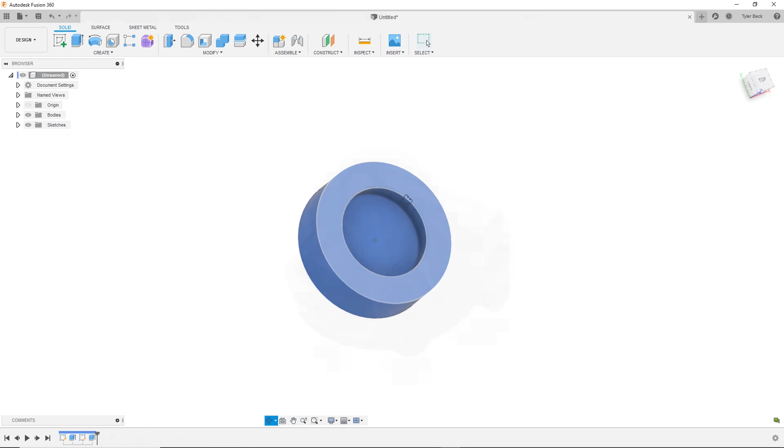How do you go from making something like this to something like this? We're going to go through this beginner tutorial making this manifold, also covering 24 tips that every beginner should learn, coming up.

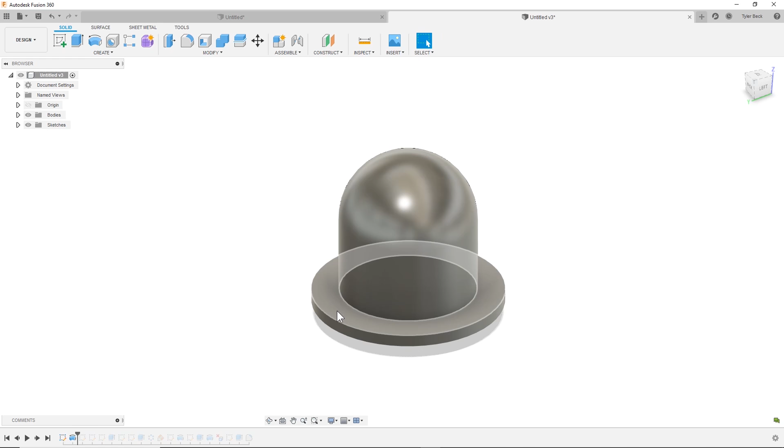When I was just starting out with CAD modeling, something like this would be really intimidating. When I look at it, it's got all these crazy features, and I start trying to think of one feature that could solve all this, and that can be overwhelming. So instead, if you can break it down into simple shapes, first, your simple solids, that's not as hard, right?

That's a revolve and then a simple boss, some cuts, patterns, adding additional features. And yes, there's some tricky parts to this, but we can do this. So let's run through, as well as calling out 24 different beginner tips that hopefully will be helpful for you. So let's get started. So I got this from the SOLIDWORKS Model Mania.

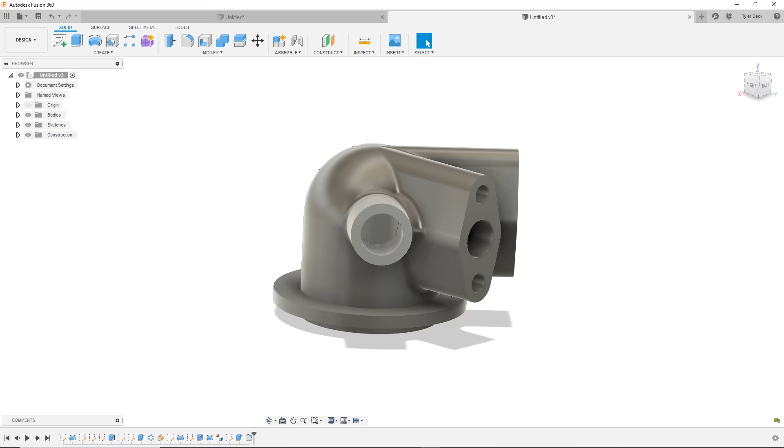If you want to check out this drawing, I'll be referring to it throughout the tutorial. But it's a great exercise, and it's something that actually can be done incredibly fast, like in minutes with a lot of practice. So this is a good one to work through. Okay, the first thing I want to do is make sure that my units are set correctly. So I'm going to be working in inches on this example.

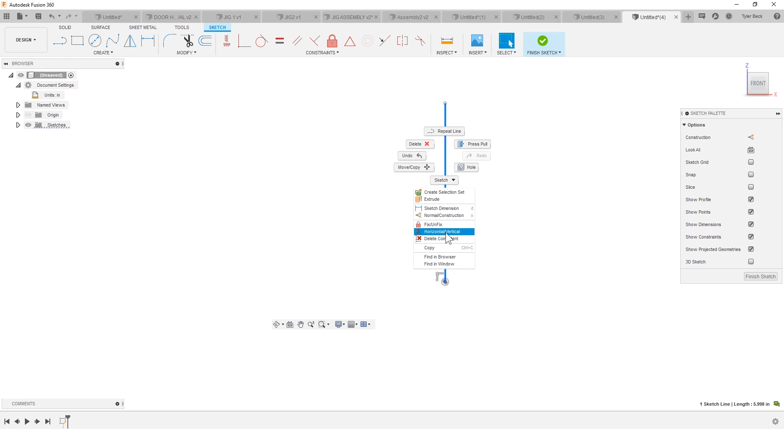Looks good. Starting a sketch on the front plane, I'm going to sketch a line, and I'm going to use a construction line. There's a lot of ways you can turn this to construction by selecting it, right click and choose construction. I hit X on the keyboard. I'm in the habit of doing that. Okay, so I'm going to start sketching line, arc by dragging. So I was about to draw the third line, and I drag it out, and it creates that line to arc. That's a tangent arc.

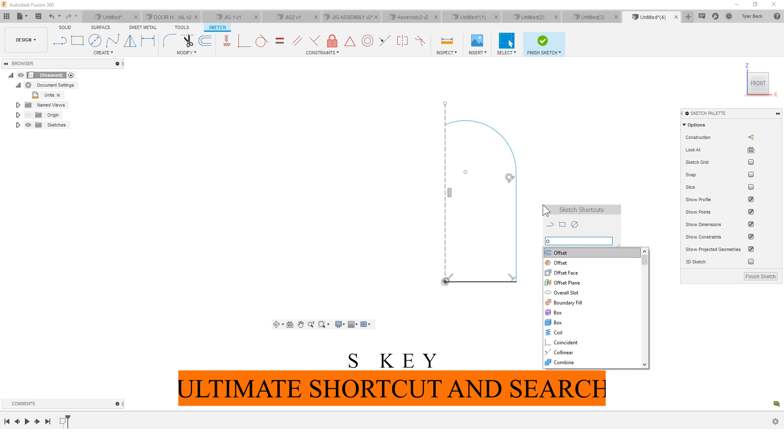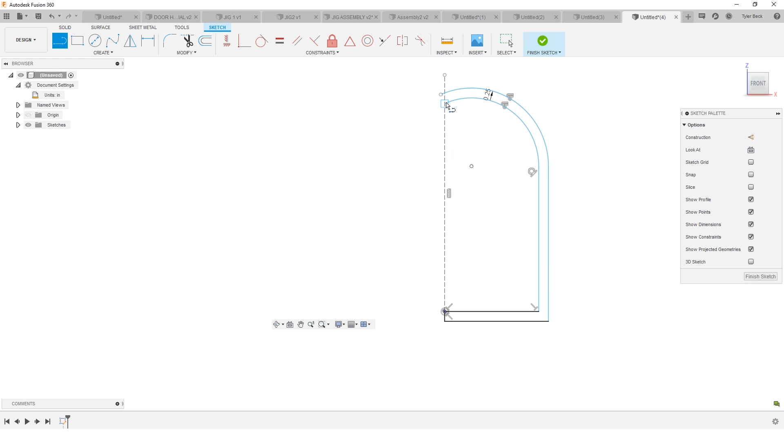Next, let's use the offset command. I'll use the S key, offset. Okay, so I'm going to offset this entire shape. I am chaining this selection, that's fine. Looks like it's extended this, so I'm going to go ahead and finish this out. Use the line command to connect that and connect that. And we don't have to trim it, but it's a good practice to clean up your sketch.

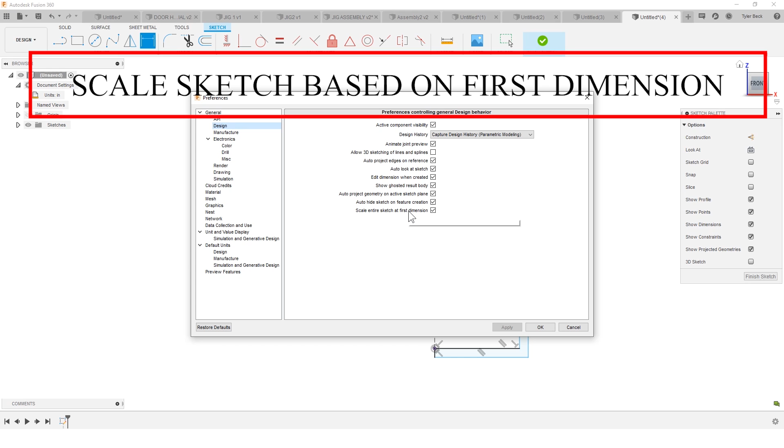S key, I'm going to use the rectangle. Okay, you'll notice that my entire sketch just scaled based on the first dimension that I dragged in. And why is that? Okay, so when you go to your preferences, there's one I love to use. It's the scale entire sketch, and I've got a tip out there for that as well.

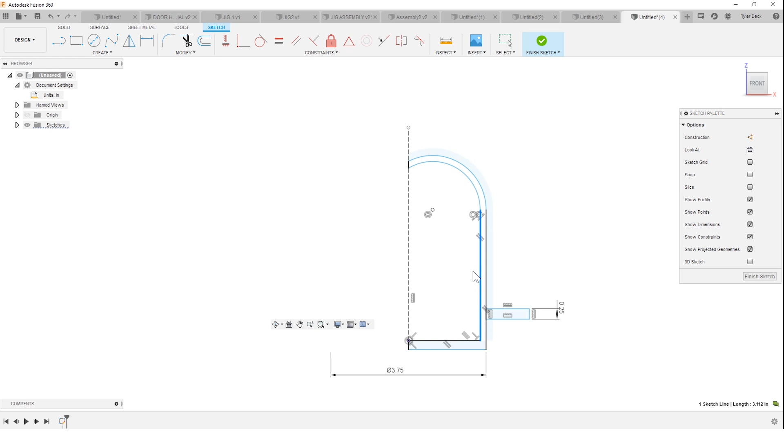Okay, so let's do some dimensions. Dimension to the construction line. And it is sensitive to the order. So I'm going to dimension from the center line, construction line first to the edge, right click. I'm going to do a diameter, and I'm going to dimension out. So it's doubling it over so that I know that it's a revolve. And that lets me avoid having to do that math, but also it's going to make it a little more clear down the road when I'm kind of editing this design or working with it.

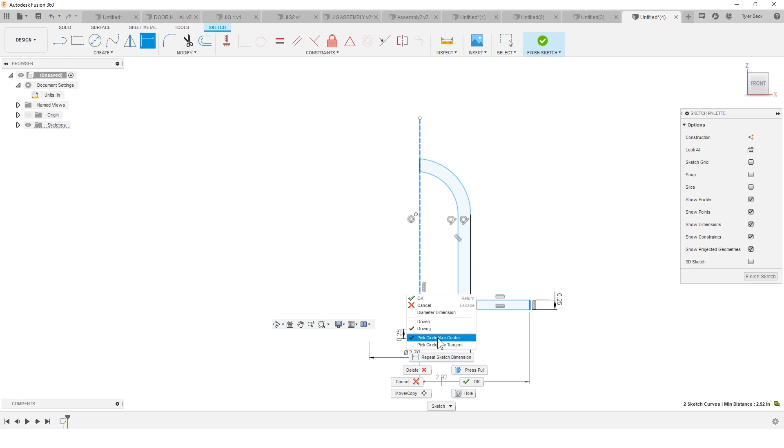Okay, hitting D on the keyboard. Okay, dragging this around, that starts to expose to me what's missing in our design. And the dimension from the construction line to this outer edge. Right click, diameter dimension. Add the overall height, go from the edge to the point. Dragging it in. Let's finish off our dimensions.

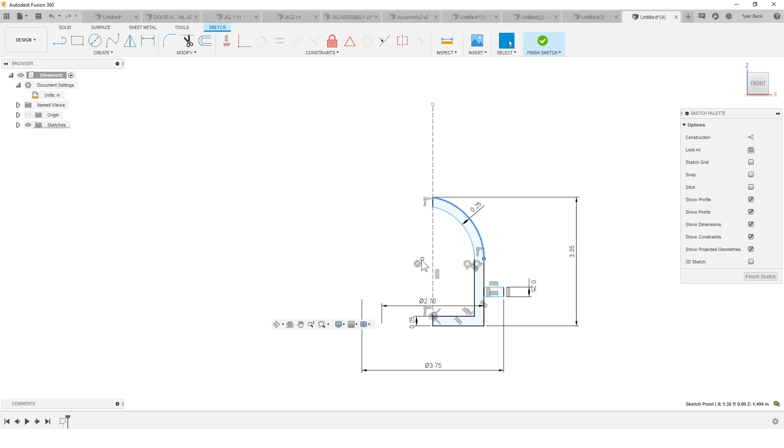Okay, next I want to make sure that this arc is defined, and you'll notice the center points are off in space. There's a number of ways I could solve that, but one way is I'm going to select the center point and the construction line and have them line up or coincide, make them coincident.

Okay, so one thing I just noticed is I messed up. And this is going to happen if you didn't intend to have this sketch entity here. I don't want to revolve these shapes, this bottom boss. I want it to be open. So how do I get rid of that?

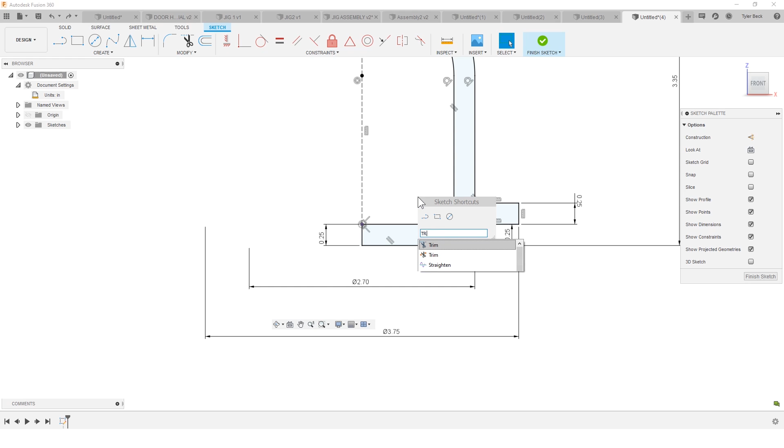Well, if you try the trim command, there's some gotchas here. When you start trimming, you'll start to lose some dimensions sometimes with Fusion. And so it can be problematic to trim away some of these entities. So another option is to just select the things that you want to keep, but not use those objects for the feature. So I'll turn those to construction.

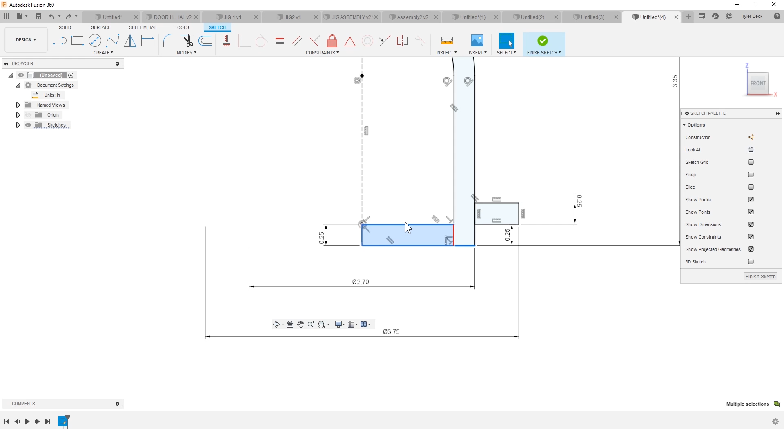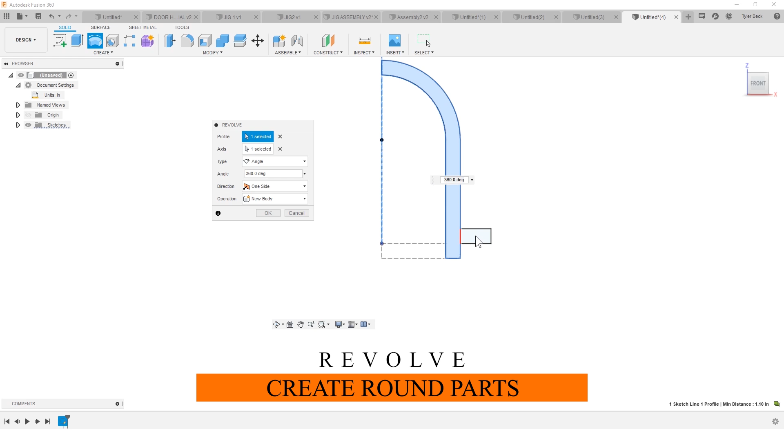So I'll hit X on the keyboard and it turns these to construction geometry. Next, let's revolve. I'll hit S, revolve. We're doing a solid revolve. So what you have to select first for the revolve is the axis, and then you can select the entities. I'm going to select this shape here, hold Control, select that as well. You can see it's revolving the entire object. So I'm selecting two profiles because they were two closed profiles. I love that in Fusion that you can do that.

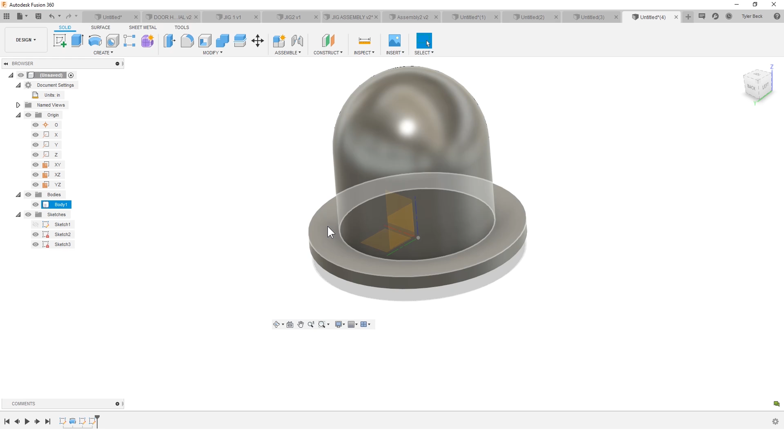All right, so I'd like to start a sketch on the front plane. You'll notice that the planes are missing, or excuse me, they're underneath the object there. So one option is to just simply select it, hit V on the keyboard, and it'll hide it. Or you can select from the tree. So if I select it here, we can hit the sketch, and now it's sketching on that.

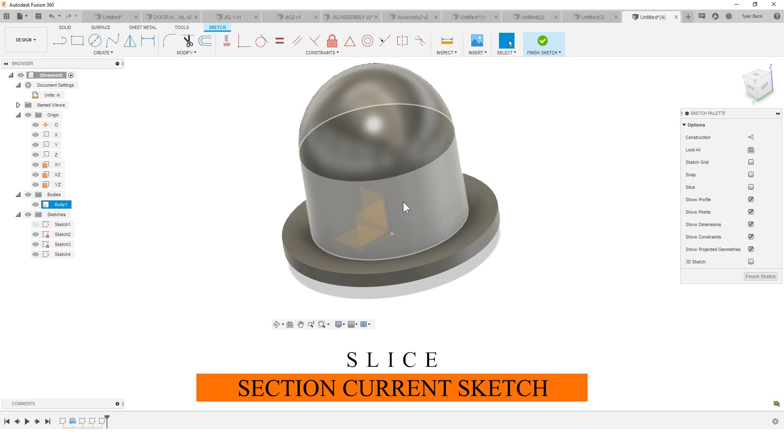Another thing I love in Fusion is this slice option. If you hit slice, even though we're working on a plane that's right in the middle, it's going to section it for us, so it makes it easier to understand what you're sketching. I love this. I'm going to begin by sketching a line, and I'm going to start by sketching this vertical line and make it for construction. I'm going to attach 3 different circles. And so now, because I've constrained those circles, you can see they're connected to that line going forward.

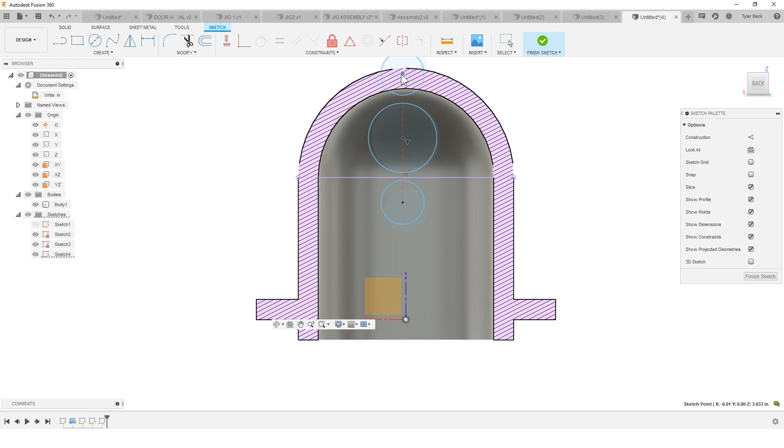All right, so what we want to do is start adding some constraints. And I'd like to constrain from this arc to the top here, and I can't seem to get these to connect sometimes. So what do you do? You can use what's called projecting. You're leveraging a past body or sketch. So in this case, what I'd like to do is project the entire body. I select it, hit OK, and it projects, and now I have these edges and lines to work with. Projecting a body is great when you've got kind of like a rounded object where there's not always a solid edge.

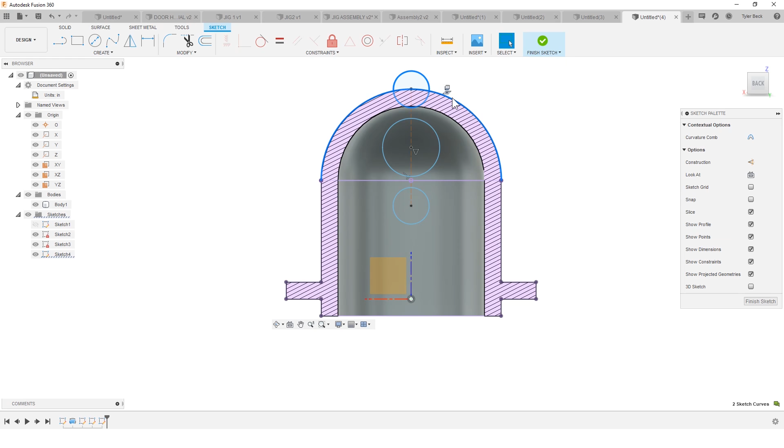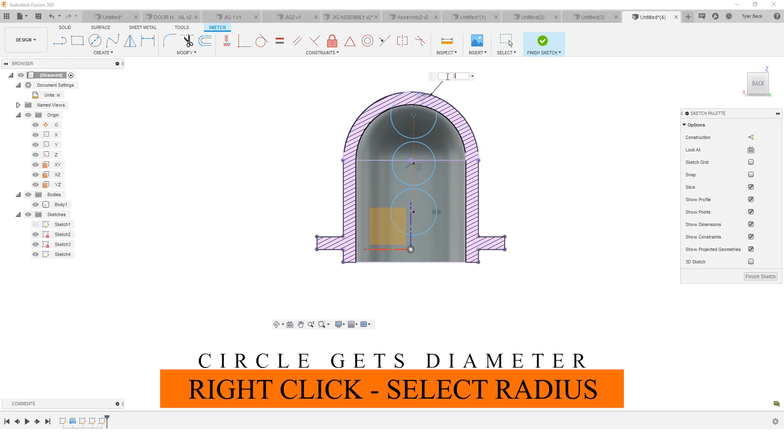So if I select this arc and this arc, okay, make those tangent, and I'm going to make these circles, right click, make them equal. Okay, so these are the dimensions I'm trying to hit. When I dimension to a full circle, it wants to do a diameter, but I'm going to right click and choose radius just because that's what I happen to know from the drawing. Next, let's place this. If we know that as a radius, we can put that in. Again, we could do diameter, either one, whichever you know. I love that in Fusion that you can just set it up how you need to place it.

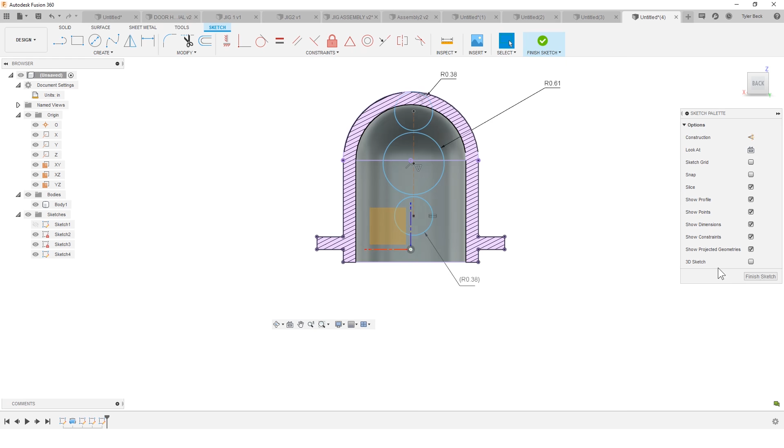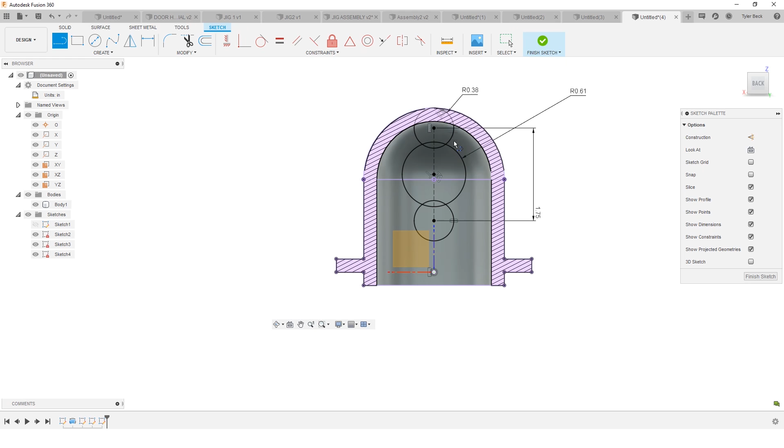Okay, so this is overdefined, and why is that? Because these are already equal to each other. Okay, so I'd like to line up this point with the origin. So right click and make those vertical with each other. Great, and then let's add the final dimension. Okay, next, let's update this dimension. I think I typed that in wrong. And then we need to finish off these sides. So I need some tangent lines between the arcs. So let's try that again.

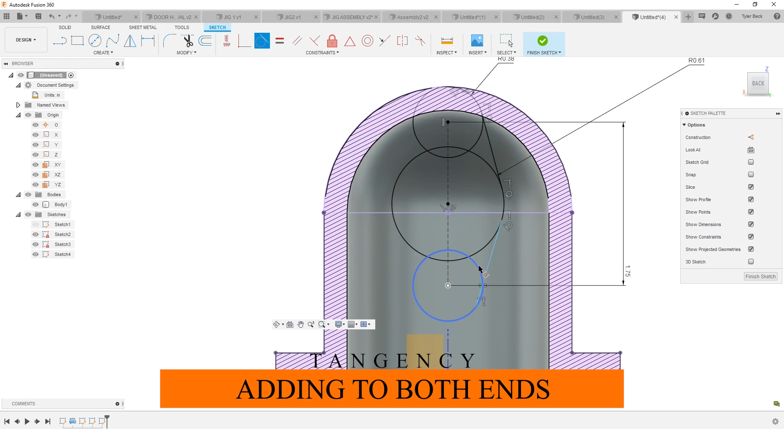So when I'm sketching a line from arc to arc, and if I do want it to create the tangency, I click and snap. You can see there is the tangent little icon happening there. So it did add a tangency here. So we can select the line and the arc, do tangency, and that cleans it up. By selecting these and adding the relationship, there we go. Great.

So instead of doing this again on the other side, let's mirror. I'm going to mirror this entity and this entity, holding Control or Command on the keyboard. And I'm mirroring across this construction line. I select that. There we go. Great. Now I don't have to trim this all up because Fusion's great at using multiple contours.

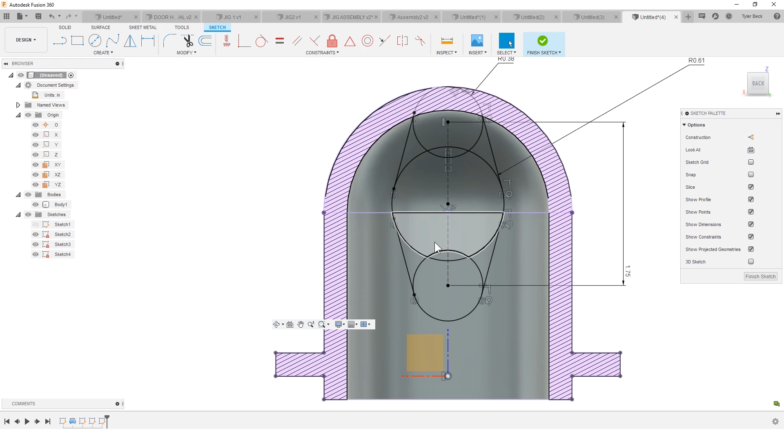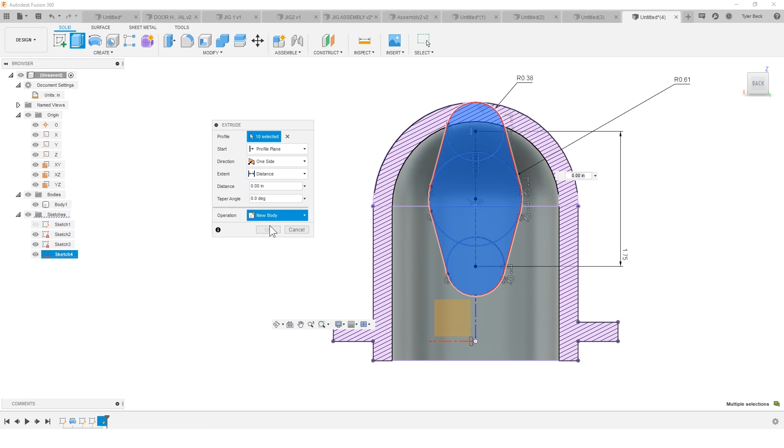E on the keyboard, E for extrude. Okay, so the extrude, we can come in and just kind of collect these by selecting on them, and I love that it keeps the dialog open and it's just selecting all 10. Is there a faster way? I could try the box select, and it grabs all 10, which is terrific. I tried selecting outer edges, it didn't really grab it, but am I doing a new body, or am I joining? In this case, I am joining the geometry, and I want to go out a certain distance.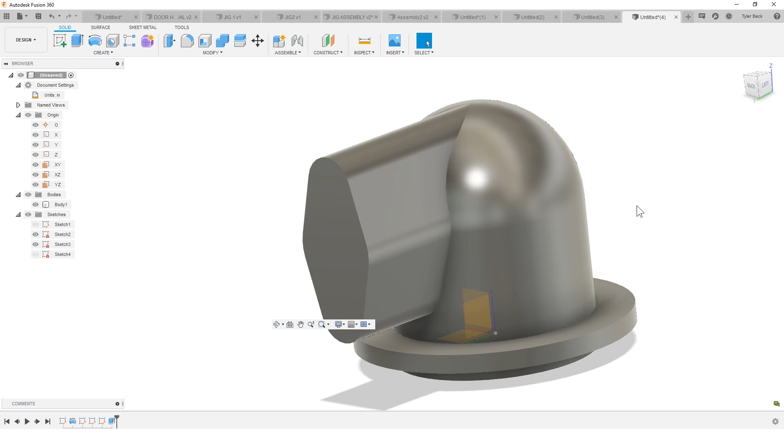We can't see it because of the slice that's happening. I could go back and turn that off, but let's do 2.75. And you can see now it's updated, even though that visual is a little misleading, but that's because I asked it to slice. It's doing what I told it to do.

Okay, now let's do the cuts. And I separated them on purpose. It makes it easier to edit after the fact. So I'm going to start a sketch on the front plane. Select that plane, hit sketch, and I'm going to start sketching a circle.

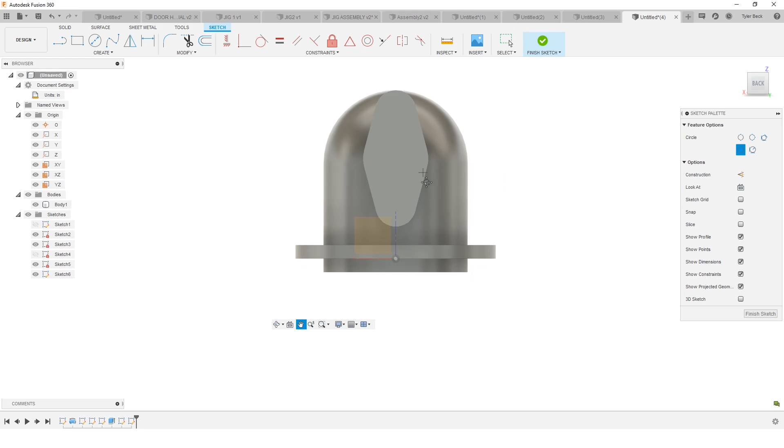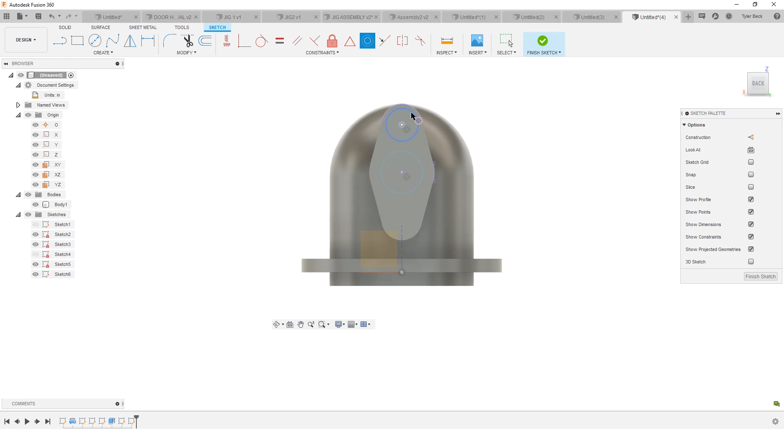Now I'd like to leverage that existing arc. So there's some different ways I can do this. If I select this arc and make them concentric, then it's going to align them. I could also use a construction line as well. And I'm going to sketch a circle up here. Same thing. If I select the arc and make those concentric, it makes them align, or again, you could just do a construction line. Finish that circle.

All right, so first thing, these two circles are equal. Right click, equal, and then I'm going to dimension that. So what's missing? The distance between these. And it shouldn't be missing. I know that this is concentric with this arc.

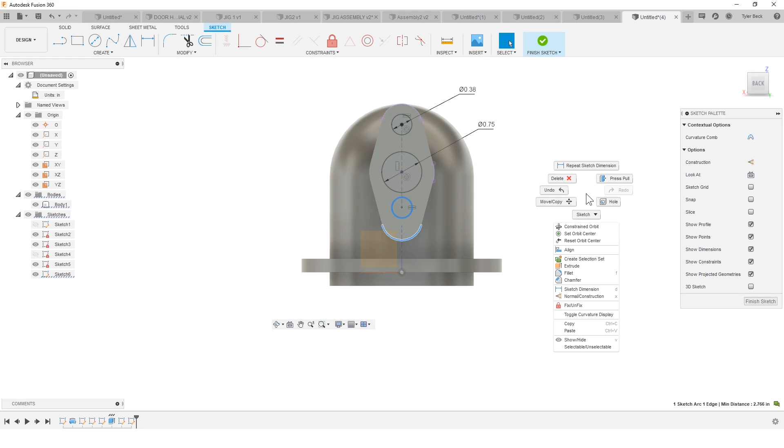Okay, so let's cut these holes. Holding control, selecting those. I could do a distance. Now, what's the challenge with that? The challenge is that it's not intelligent and necessarily tied to the depth of this. If I were to ever update this depth value of that boss, that'd be a problem, right? And I'd have to update both.

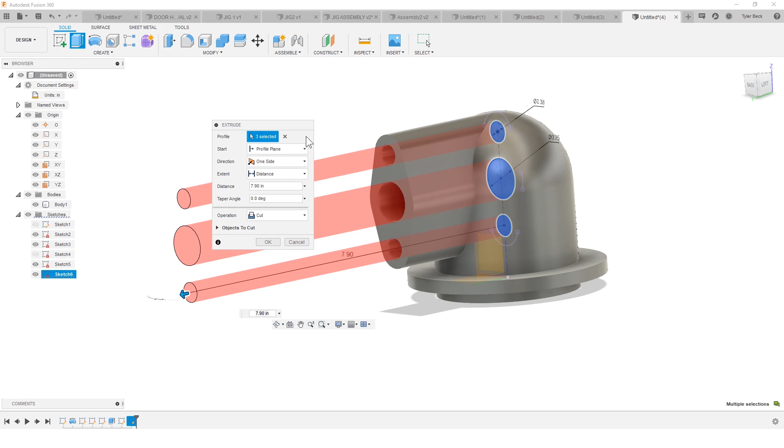Instead, I can make this intelligent simply by having it cut all the way through, so it always cuts it. Or instead, I could do to the object and then set a distance. We'll do a through all. It's going to always cut that out.

Okay, the next thing I want to do is add another boss. And it looks like it's the boss with the holes that match this, as well as a round circular boss with a hole in it. We'll tackle that next. Cool. Okay, so the next thing we need to do is this same type of extruded boss. And that looks like a pattern to me. It looks like we need to pattern this whole object, including the cutouts.

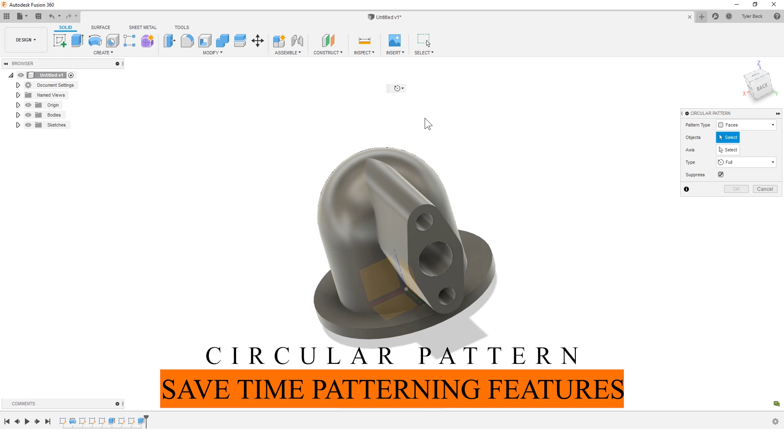Okay, so I'm going to talk about the strategy of this order in just a minute, but for right now, we're going to do circular pattern by typing S key circular pattern. And one thing I love about Fusion is you can select all these different ways of patterning, but the first thing you have to decide is what are you patterning. Faces can be a little confusing when you have some complicated geometry and a lot of faces to select.

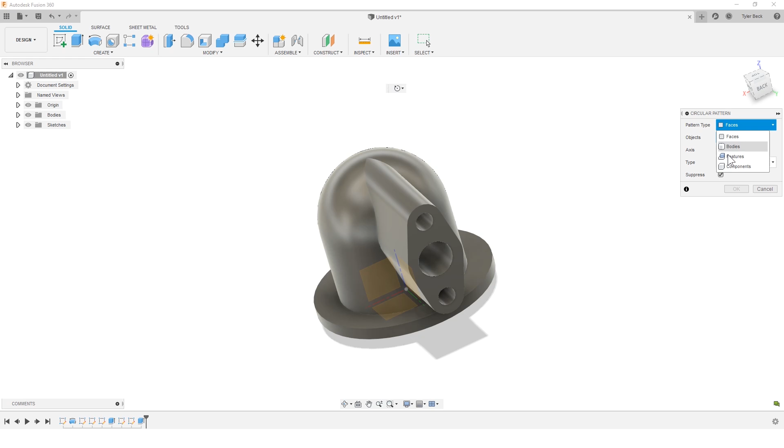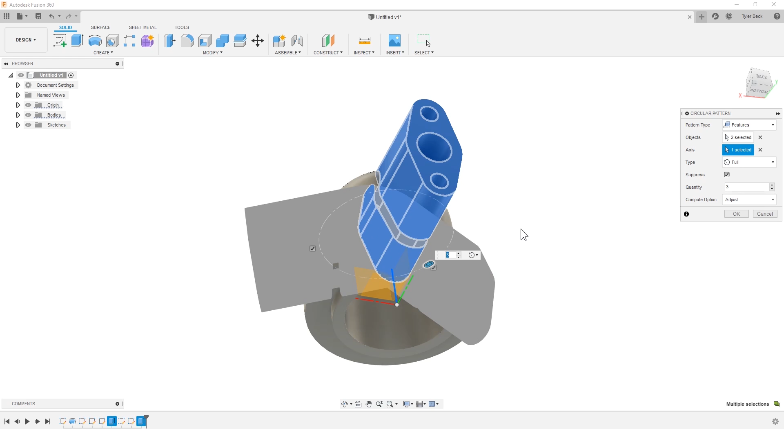Bodies can be helpful when you have multiple bodies, but in this case, we're just doing one big body joined together, one component. So I'm going to do features, and the features are down in the tree, and I can select them here. I'm doing the extrude and its cutout, right? Both. So two features, and those are going around this circular axis or this rounded face, all of those would work. I think this axis in here would also work. Great. So I can select any of those things.

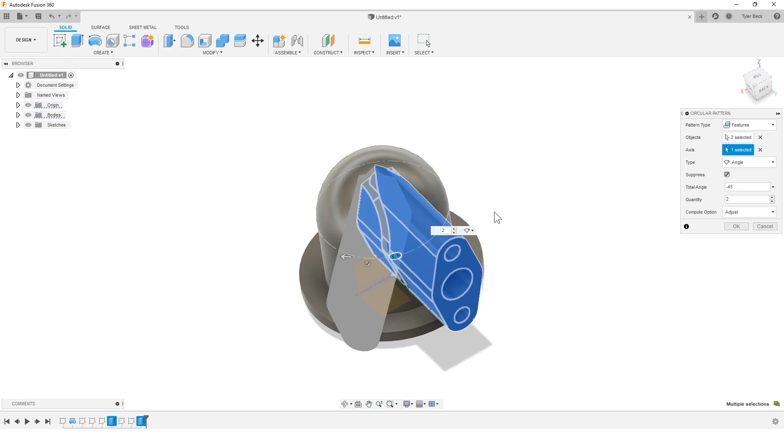We're going all the way around. That's fine, but we could just go at an angle, 45 degrees, and how many do we want total? Meaning including the original. So we'll do 2. And I think I want it coming the other side. There we go. So negative 45. Looks like it's solving.

Okay, so look at that pattern. It looks like that cut doesn't go all the way through. So maybe if I do an adjust, looks like that solved it. It's now cutting those through. That's good because it's resolving the cutouts. All right, well that's good.

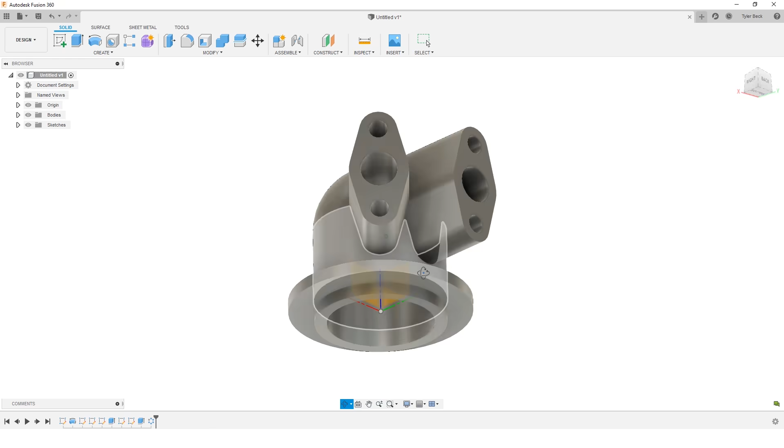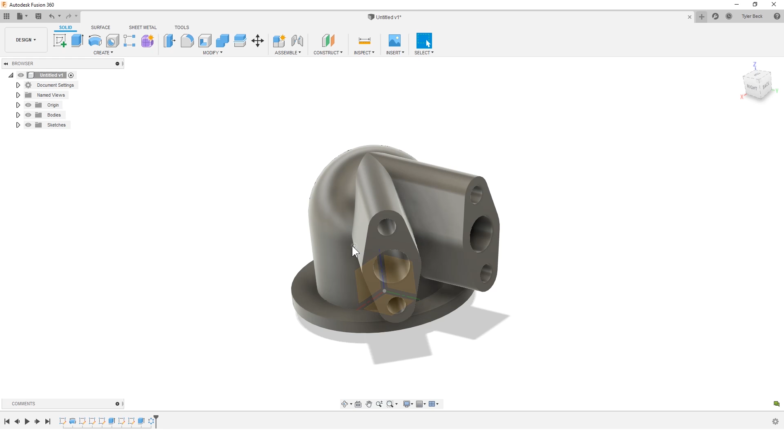But one thing I'm anticipating is we're going to have to cut all this stuff out after we get that last boss in there. So I guess we'll deal with that later. I try to do my cuts after I've done all my solids, but because this part has some complexity with patterns and with these 3 bosses that intersect, this might be the best strategy. Let's keep going.

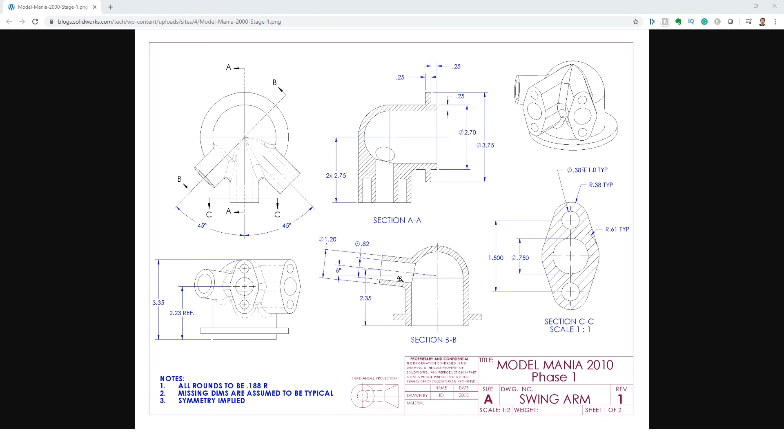Okay, next thing we want to do is tackle this boss. And so it looks like it needs to be at a plane at 45 degrees as well as dimensioned off at an angle. Okay, the next thing we want to do is add an angled plane.

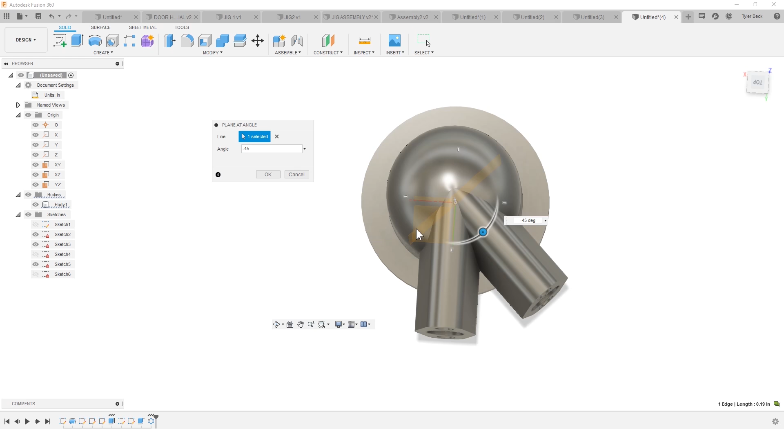So I'll do a plane at an angle. I can use this axis as a reference. And then it's 45 degrees, so I don't know if it's going to be off to that direction or a negative 45. So when I look at the preview, it's telling me where to go. Okay, that looks like the right direction. Terrific. So there's our angled plane.

So I can select that and start a sketch. I can also select it from the tree. You can see it's now construction geometry.

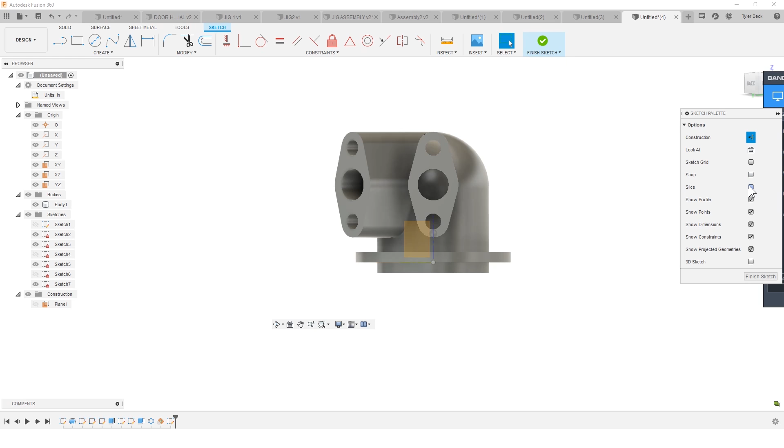Okay, so now that we need to do this sketch, there's lots of ways we can tackle it. Some tricky dimensions on it that I've noticed. If we slice it, that can make it a little bit easier to work with. I'm just going to sketch a line off in space. And this is construction, it's at an angle, and I'll start adding the dimensions that I know. So I do know from the bottom to the end point is going to be 2.35.

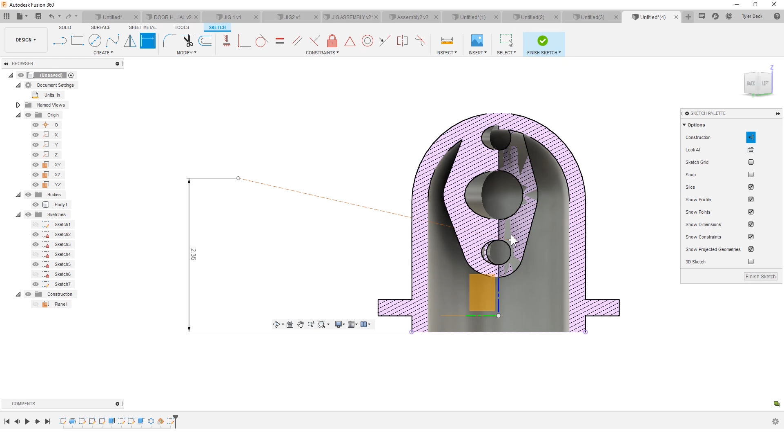I also know that it's coming off at an angle, so it's using this edge or this centered circle of the whole boss as a dimension. So we can actually dimension from that reference angle. Or if you're more comfortable, if you don't want to do that projection, we could just do a construction line. There should be a snap to the midpoint, construction line.

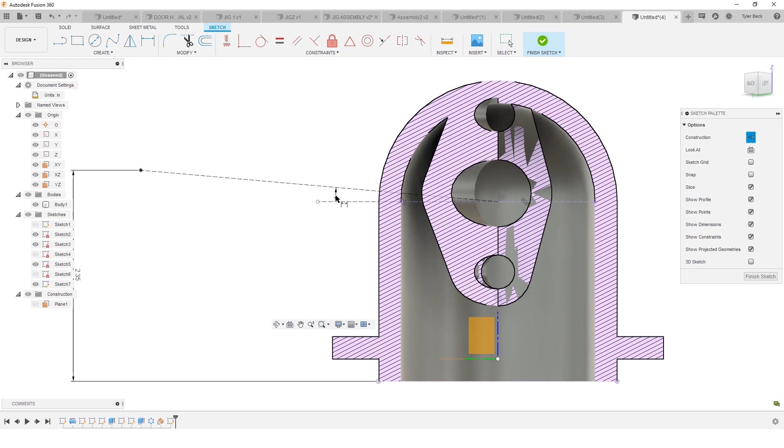Six degrees. And then I'm going to do a rectangle. I'm going to try a special rectangle, 3-point rectangle. Start at this end point, click somewhere down along the line, and it drags up a parallel rectangle. So I love that one.

Okay, so I did construction, didn't mean to do. I'll hit X on these and turn these back to solid.

Okay, so these are solid, and what I'd like to do is dimension across. So back to that trick. Select the construction line, outer arc, right click, to diameter. Place that, it's 1.2. What are we missing? The length. And so by looking over the drawing, I think it's inferred that this is actually 2.4 from end to end, horizontal distance.

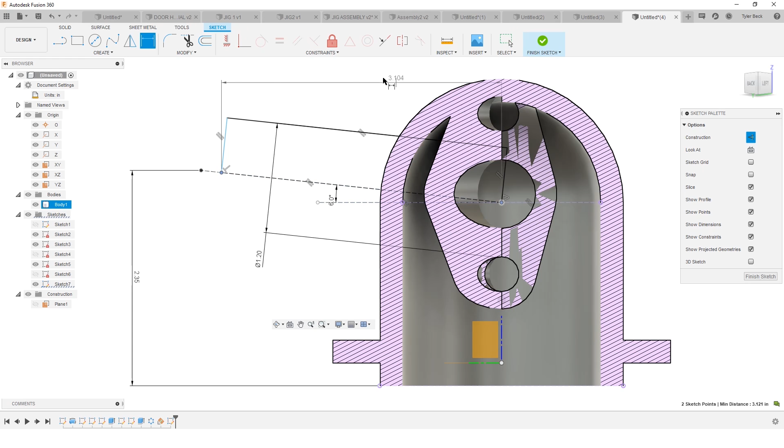And so if we now revolve that, it's a solid. Okay, there we go. There's our revolve. You can notice the interior is all kind of a mess. We're going to get to that in just a minute.

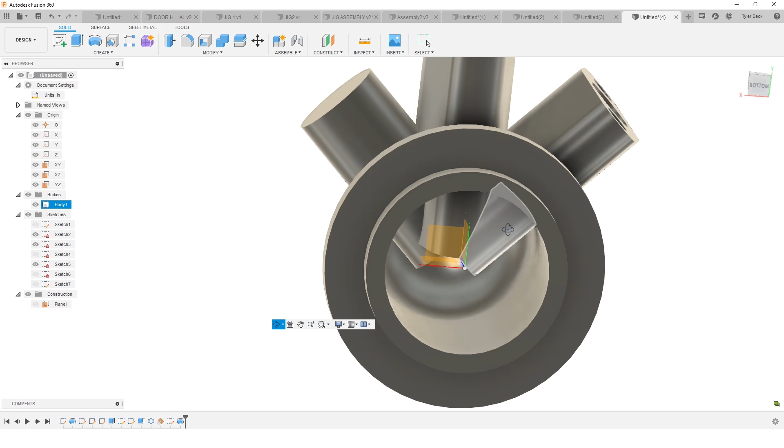And we can reuse the sketch from the past and cut that out. If I start a sketch on this face and sketch that hole, drag in the dimension, 0.82.

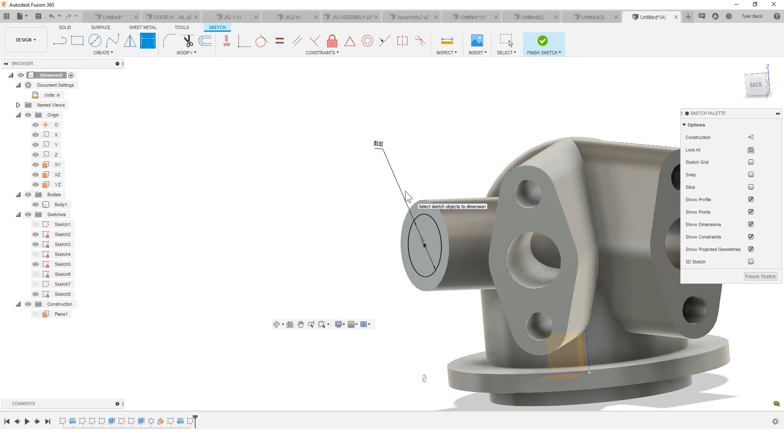Okay, so how do we want to do this? Do we want to cut until the end of that body, or should we do it from the end of the extrusion? So we can extrude the cut, and we'll do up to. I'll pick the other side, and it cuts it all the way through. And so it's intelligent, tied to that feature.

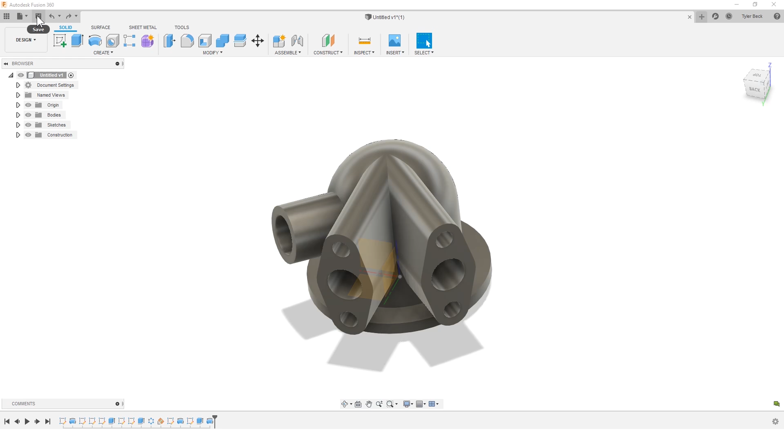Okay, one embarrassing thing that I forgot about this whole time was just saving, right? I try to hit save right when I get started.

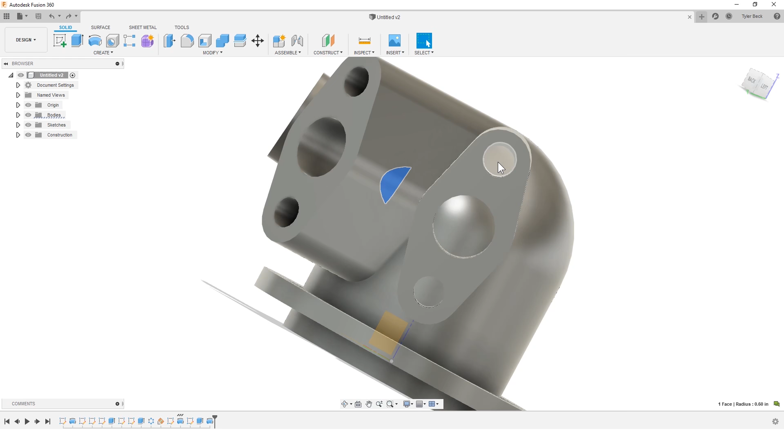Okay, so the strategies to this part, we've cut out the underlying area, but I noticed there's some conflicts here. There is this kind of boss sticking out where that hole should have cut it, as well as I think this is kind of still has a little bit of material left there, even there as well. Right? So how do we remove some of these?

One tool I love is just the ability to delete and patch faces in Fusion. So if I select this face, I can hit delete on the keyboard and it tries to delete and patch it. And that did a really nice job.

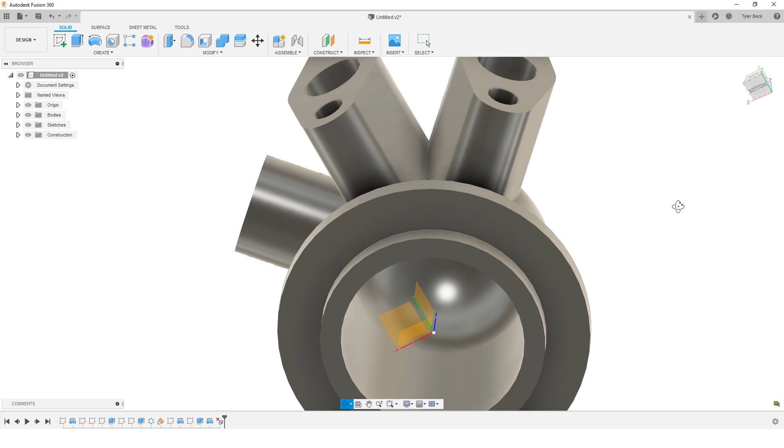That's awesome. Next, this hole, I hit delete and patch, and it, for some reason, it's going all the way through the rounded boss. And I think it's because it doesn't know where to finish, because that is a rounded face at the top. So how do you reuse this geometry instead of starting over and sketching a line and an arc and a bunch of circles?

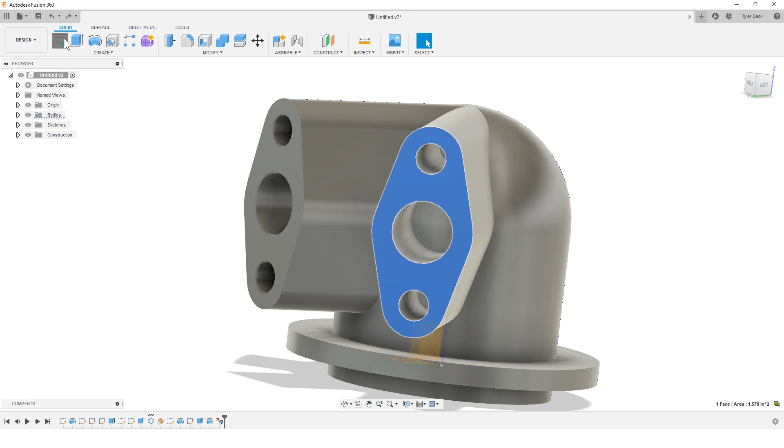So I'm going to start a sketch on this face. And I'm going to select the face, hit P for project. And I'm using these faces. Hit OK, and it redraws everything.

I love this tool. In SolidWorks, we use something called Convert Entities, kind of a very similar experience.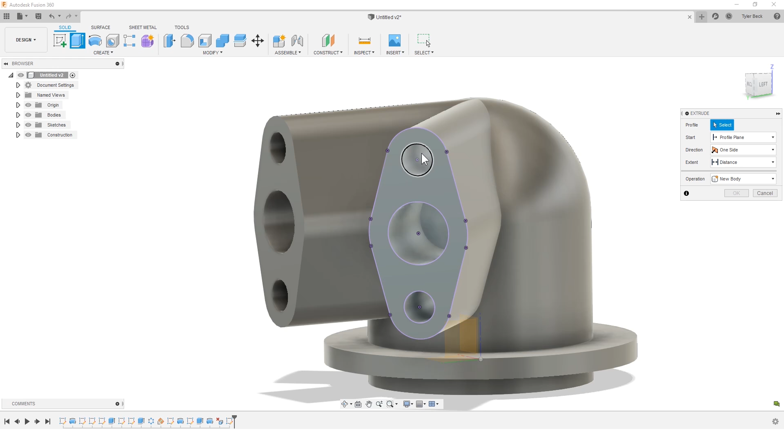So if I now do my extrude, I'm going to do these 3, and these are holes, so they're cuts. Now, how are we going to stop it at the right location, right? So we could come to this point or the origin. That looks like that's where I actually need to stop, is right in the center.

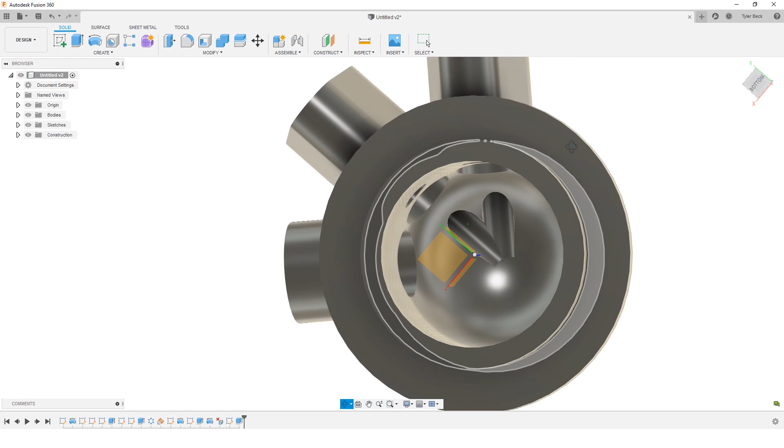Okay, so if we want to pull fillet from toolbar, I'll search, select these edges. Looks like it's got those.

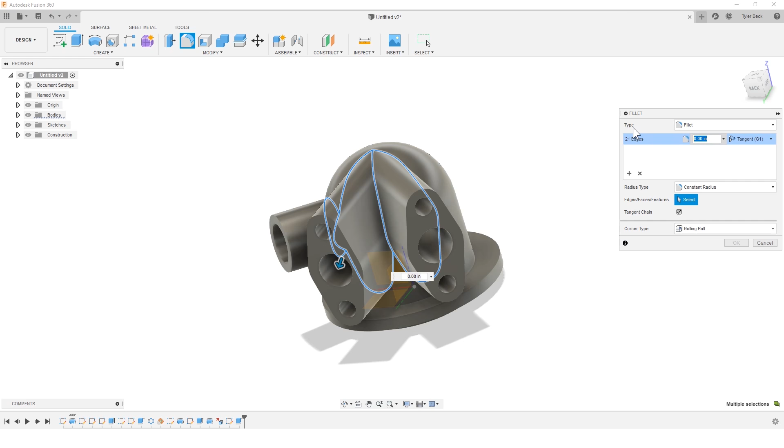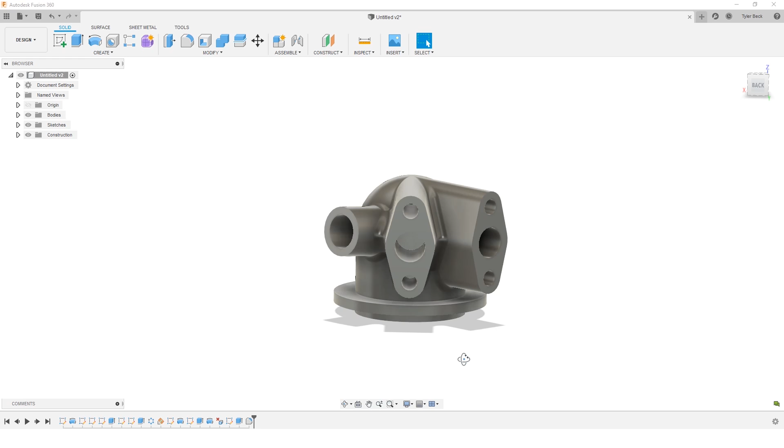And this is amazing, actually. In Fusion, it does such a great job of solving all of these faces, even though we shouldn't have to select them in the right order. In a lot of CAD systems, you have to do the rounded fillets on one edge, one side first, then the next, where there's convergence. But Fusion does such a nice job of solving these anyways, so I was just able to select them and do those rounds.